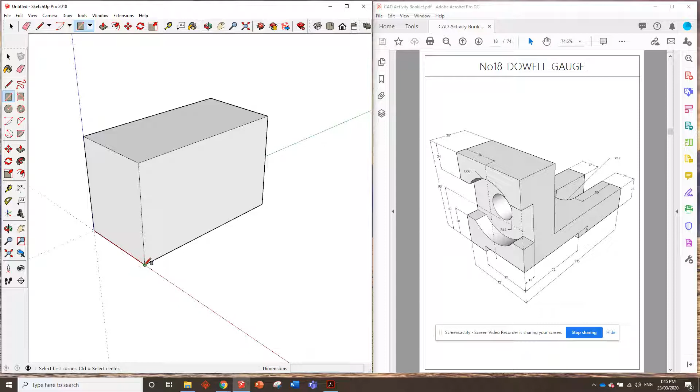I reckon let's get rid of this little chunk at the bottom here. You can see that it's only 6 millimeters up and it's 72 millimeters long and it goes 50 millimeters in. So that's pretty easy. Rectangle tool, click on the bottom corner over here, drag it up and we'll go 72,6. Should do it the right way. Perfect. Now we can just grab the push-pull tool, click once, drag it across. If we type in 50, enter, that's done it perfectly. So that bit there is the same as that bit there.

All right, now let's maybe work on this front sort of chunk, I guess you could call it. So we need to make a sort of standing block and remove this part at the back for, I guess, the dowel channel there. So we've got 36 millimeters will remain of it. So let's put that line in from the top corner, 36 millimeters. There's our tape measure line, and we can draw a pencil line straight across the top on the red axis. Perfect.

Now, we need to figure out how far down it goes. Doesn't give us any information on how far down it goes, I don't think. No, but it does tell us over here how thick the remaining piece is, and that's 25 millimeters. So if we get the tape measure, measure up 25, and we can then grab the push-pull tool, click on that, and go there, boom. So that's that done. We'll work on this front face first. Seems easy enough.

Because we're working with the circles here, looks like we've got to put in a couple of center lines to center that big circle and that small circle off. So let's get those in. The first one is 48 millimeters from the bottom and it runs across. So I'll grab the tape measure, 48, enter, and we'll draw that line straight across, 72 millimeters. Perfect. The next line is 36 millimeters across, so we'll go 36, enter, and we'll draw that one straight down to 84. There's our center line, that's what both circles are going to go off.

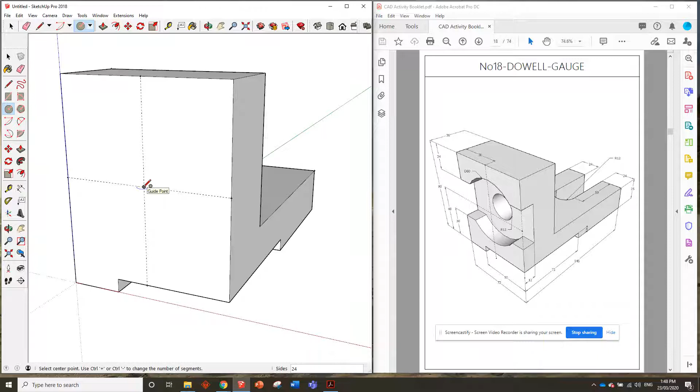It's going on the blue direction. I want it on the red, I think, or the green. Green. So I'll just hit the left arrow key to get it on the green. Click once. The diameter is 60. That means the radius will be half of that. So 30, enter. Perfect.

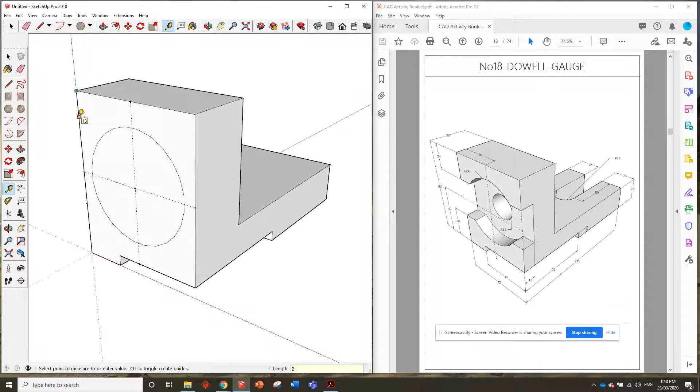Now we have to also draw in these sort of flat spots across. So there's a little channel there. And that's 30 millimeters from the bottom, 24 millimeters from the top. So pretty easy. Measure up 30 millimeters, measure down 24 millimeters. And we'll just use the pencil tool or the line tool to go from here straight across the other side on the red axis. Perfect. Now we can remove all the unwanted lines with the rubber, and then you can see we've got that kind of shape on the front.

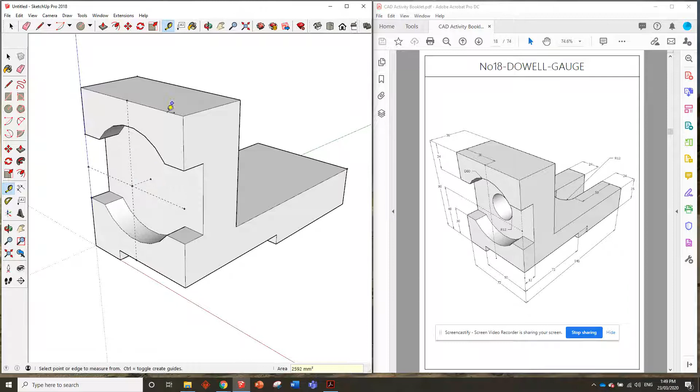We'll use the push-pull tool to push it in 12 millimeters. Click once, type in 12, enter. Perfect. All right, now we need to extend that center point to that new face. So we do that with the tape measure. From here, we want to go across on the green axis 12 millimeters, and that gives us a new guide point we can draw on. On there, it's already a green circle, that's perfect. And what's the information on that circle? Radius 12, easy. Type in 12, enter. Okay, we can push this one all the way through and double check we've got a hole in there. We do, perfect.

Okay, now all we've got to do is that little channel at the back. Seems easy enough. 24 millimeters each side. So we'll go 24 millimeters in from here. And we'll go this way 50 millimeters, and that is where the half circles are going to end, at 50 millimeters away, and the radius of this is 12. So from here, I need to draw 12 millimeters along the red axis, enter, and that should be enough information to draw my half circle in.

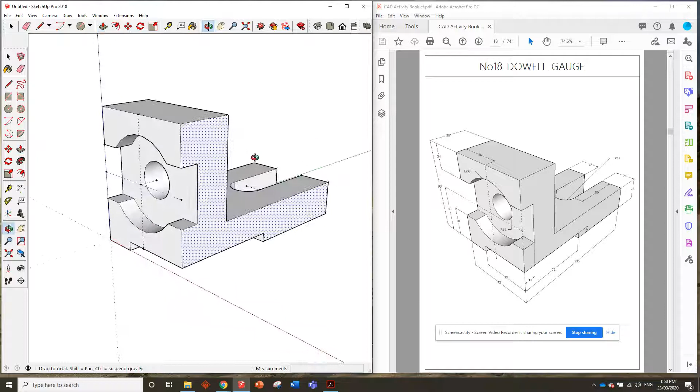So I'll grab the arc tool, click on that first point, click on that second point, swing it all the way around to a half circle. Perfect. Now I can grab the line tool, and at each end of the half circle, take it back to the start. I need to hit escape to remove that line. Perfect. Now I will just click on that once, hover over this bottom line here, and that's removed that perfectly. Okay, look at that. That's a dowel gauge if I've ever seen one. Let's edit, delete our guides, and that looks pretty good, I reckon.

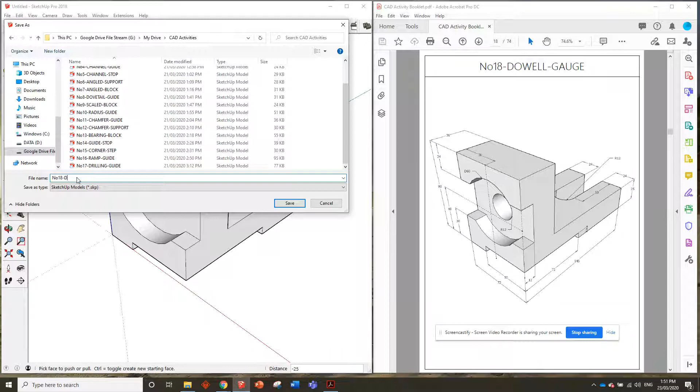Yeah, good work. All right, so all we need to do is file, save. We're going to save it in the right folder, which is our CAD activities. Call it number 18 dowel gauge. Okay, great stuff. We'll go file new to start our next one, and we've got the hex block.